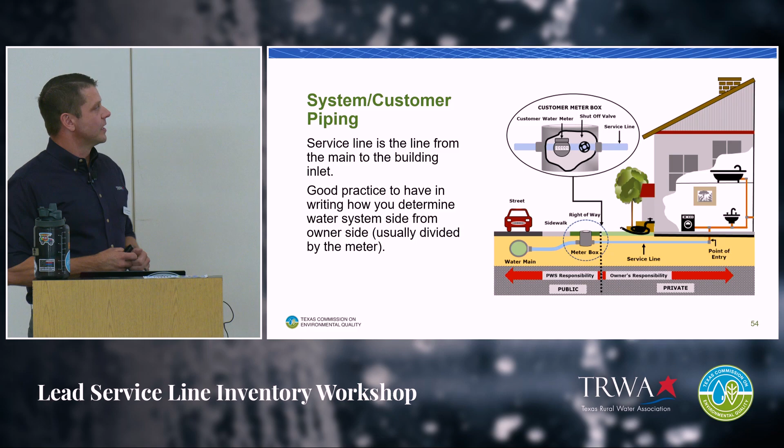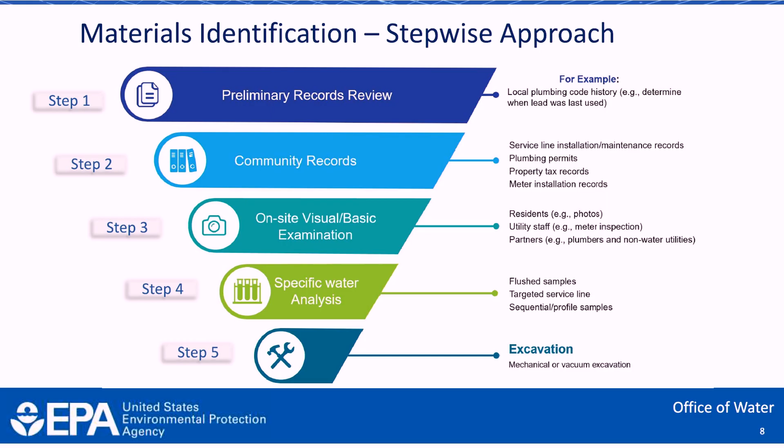So the process of doing the inventory is a multi-step approach. The first two are what we're working with initially. You have to do a preliminary records review and then also look at community records. The idea from TCEQ is that we want to do everything based on paperwork, as much as possible, before you go down to step 3 and further on to do on-site investigation or visual examinations.

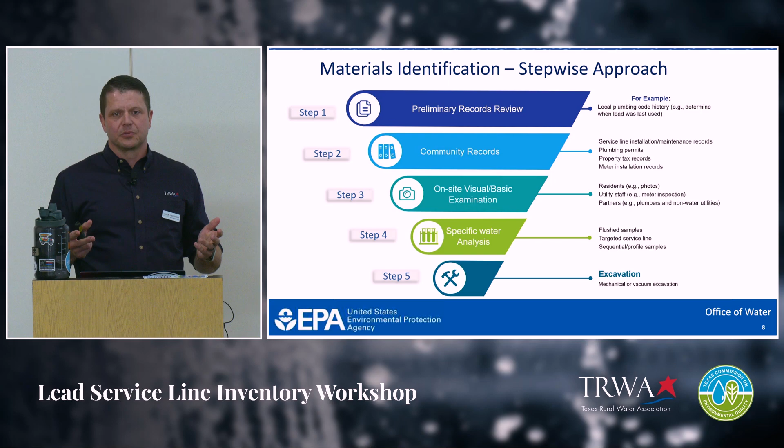So record review, as we've said multiple times, is a must. Under the LCRR, initial inventory must include all service lines, so as we explained, the entire service line, regardless of ownership. The initial inventory must use historical records, so you have to do a record review, as we've mentioned multiple times.

Non-lead must be determined to be non-lead or galvanized requiring replacement through evidence-based records, investigations, methods, techniques. You have to prove it to show that it is in fact non-lead, not just a matter of, I'm pretty sure that it's all PVC. There has to be some kind of records that you are reviewing to state that. If the water system is unable to demonstrate that the galvanized service line, say on the customer side, was never downstream of a lead service line, then you must assume that the upstream service line was in fact lead.

Question: When you refer to record review, let's say we have to prove that it is PVC or polyethylene tube, so we have the as-builts, right? But most of the as-builts don't necessarily show that it's a service line from the corporation to the meter to the angle stop, right? But it shows it on the detail. Is that something we can use? Answer: As long as you have a record of it to show that that is the material that was used, that is a record.

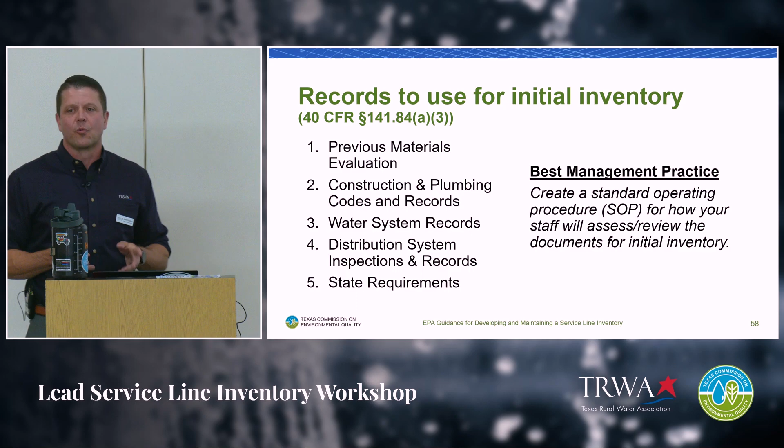For your records review, the initial inventory has 5 different components listed for how they want this done: previous materials evaluation, construction and plumbing codes, water system records, distribution system inspection records, and any other state requirements - in our case, TCEQ. I'll add a note here: it is best management practice to have some kind of SOP for how you are determining lead, non-lead, galvanized, because interpretation can vary from one employee to the next. So if you're using various people to go out and do these inspections, or find records, it's good to have a set standard for how you're determining this.

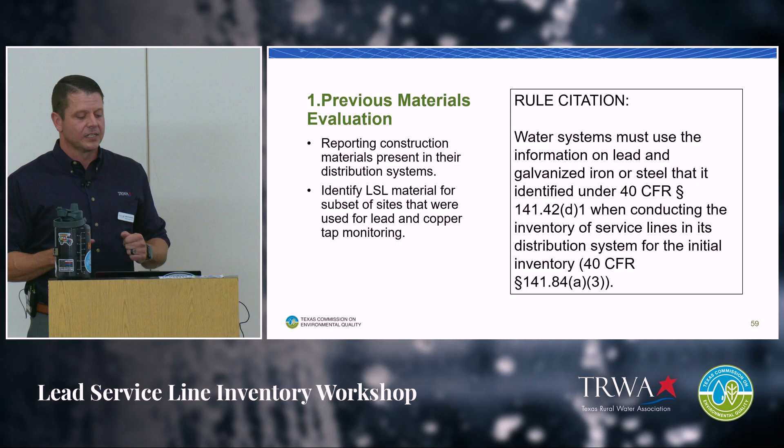The first one, previous materials evaluation - the rule citing water systems must use the information on lead, and galvanized iron and steel, as identified in 40 CFR when conducting the inventory of a service line and distribution system for the initial inventory. So you're looking for reporting construction materials used in the distribution system, identifying lead service line materials and subsets of sites, trying to do an evaluation of that - but this was primarily driven from the 1991 Lead and Copper Rule, where systems were required to do a material evaluation before.

This was to identify potential lead areas in your system, and this is where you developed your sample siting for your tiered sites. So in a way, we've done this material evaluation in the past. The idea is that we want to go back to this as the first step - what are the documentation and information you reviewed to do that part? Start with that.

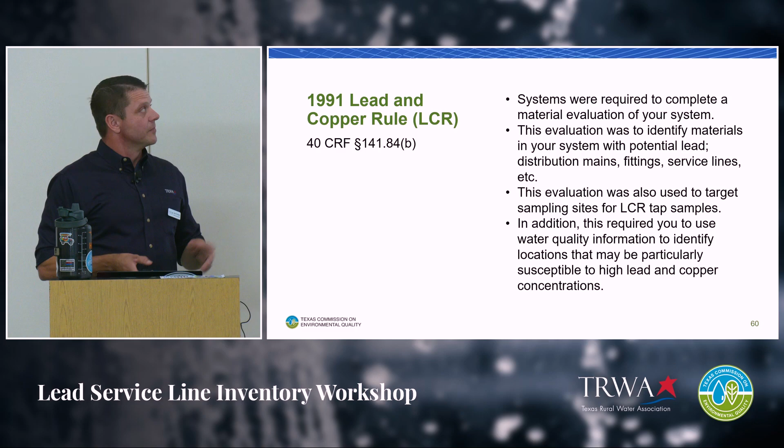In addition, this required you to use water quality information to identify locations particularly highly susceptible to lead. So, of course, whenever you were building your sample siting plan or your lead and copper sites, you were to use the more susceptible sites for that testing. Again, that's what they're referring to here - look back at the information you collected then.

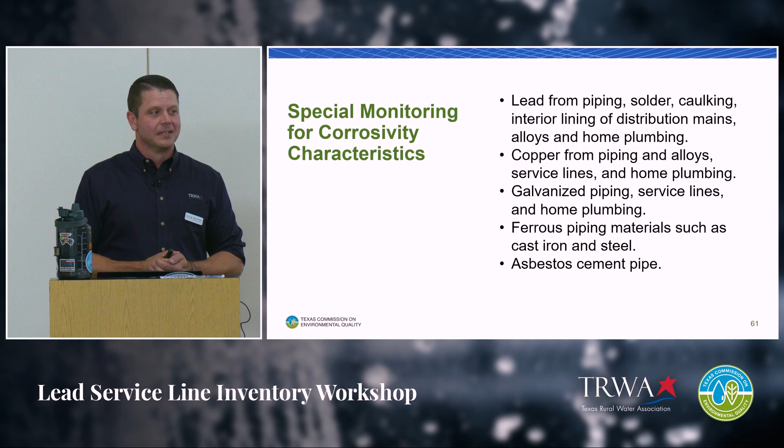There was also a requirement for special monitoring and corrosivity characteristics. This was part of looking for lead and solder in pipe, looking for copper lines, galvanized, ferrous, iron and steel, and asbestos. So you built an inventory to some degree at some point in the past. This was prior to my time in water, so I don't quite remember doing this particular step back in the 90s area, but this was in place.

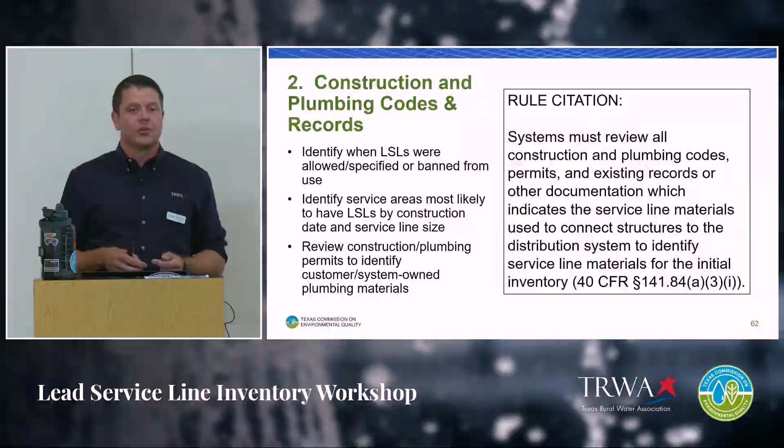Identify areas that are most likely to have lead service by construction dates or service line sizes. At a certain point, we weren't even allowed to put in a smaller line, so less than 2 inch. So if certain sections of your system are 1.5 inches, you can almost date them back to a particular time that could be more highly susceptible for lead lines.

Review construction and plumbing permits to identify customers and system-owned plumbing materials. Some background: in 1986, the Safe Drinking Water Act had an amendment for lead-free. There's a 2-year period from when EPA establishes something for the state to actually adopt it. In July of 1988, TCEQ adopted that, which is why they used the 1989 number. Anything built after 89 should be considered non-lead because there was a lead ban from 88.

That's also why the template for the lead service line inventory asks about this date. When you're looking for construction and plumbing codes, or plumbing records, there are a few different locations you may be able to search to find some information.

City websites may have some of that. A lot of this is city-based, as you can tell. Rural water supply corporations or districts may not have the particular resources available, but sometimes on the websites there's the clerk's office, code and enforcement, a planning department, city archives. We've found that in some smaller areas, they are located even in local libraries or county offices for plat approvals.

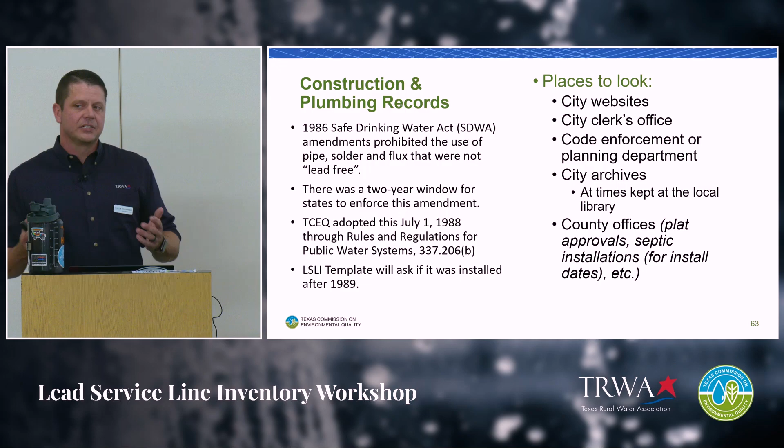I don't know that all counties do this. I know we're seeing a lot more of it now because of all the growth, but counties have to approve certain subdivisions coming in, what they're being built as, the size, what's being installed. So there may be some information, if your county was doing this previously, to search up dates and materials used that way.

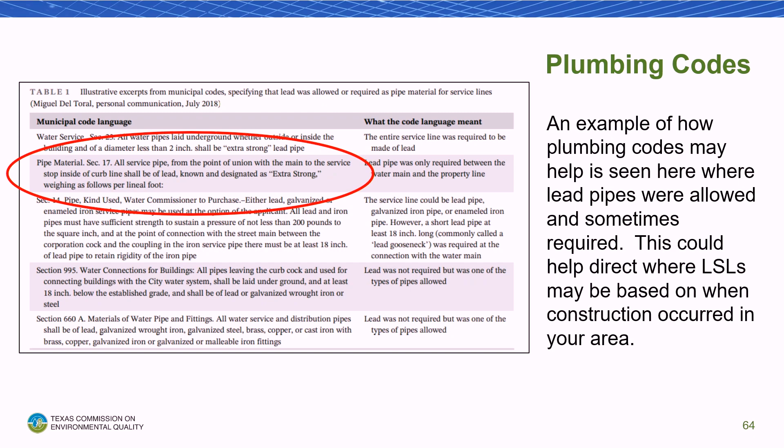This was an example I pulled, you won't be able to read this. I can barely read this, and I'm standing in front of it. But in the EPA manual you received, there's the spiral document, and also online on that Dropbox link shared in the chat, you should be able to download that or find it on EPA's website.

It's the guidance manual for lead service line inventories. There's a section I noted was on page 42, showing an example of why they're saying look at plumbing codes. It states that the service line shall be made of lead and then be labeled as extra strong. So there may be plumbing codes or ordinances in cities or counties that required certain materials. What we're looking for is to find dates of when that stopped, so you can identify anything built within that time frame as more likely to have lead.

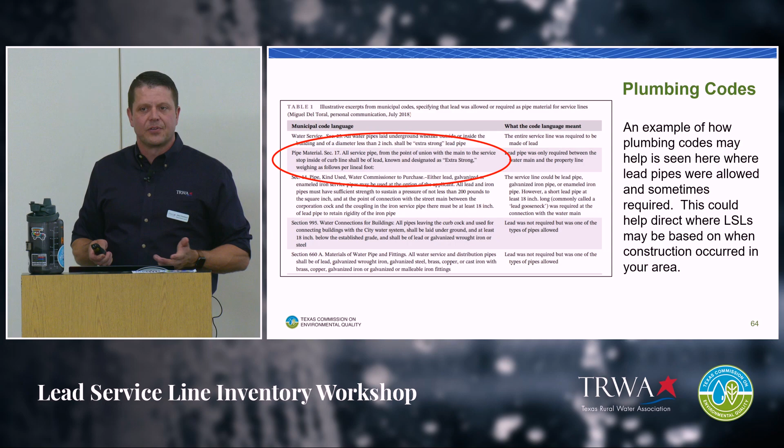Also, in the EPA manual, it states that most lead service lines are 2 inch or less. There are very few cases where buildings receiving a service of 3 inches or higher were made of lead service lines. So that may be another way to help identify focused areas. If you have large service lines, say going to an apartment complex or a larger building above 2 inch, there's a good chance it's not going to be a lead service line based on historical information.

County appraisal districts. I did actually include some fun facts from a lead service line inventory workshop. This is information also in the EPA manual: lead service lines were primarily installed in the late 1800s all the way to the 1940s, and some communities continued through the 1980s. In one workshop, someone more of a historian shared that the use of lead service lines often worked around war times, because of the metals and materials needed for times of war, which would alternate the type of piping materials used for water systems. It was interesting to note those date ranges and their impact on your utility.

Appraisal information by itself is not enough to determine if it is lead or non-lead, because it will give you information on the customer side. So if you look up your county appraisal district and find that a home or building was erected in 2001, that should be evidence enough to show that it is non-lead, since it's after 1989.

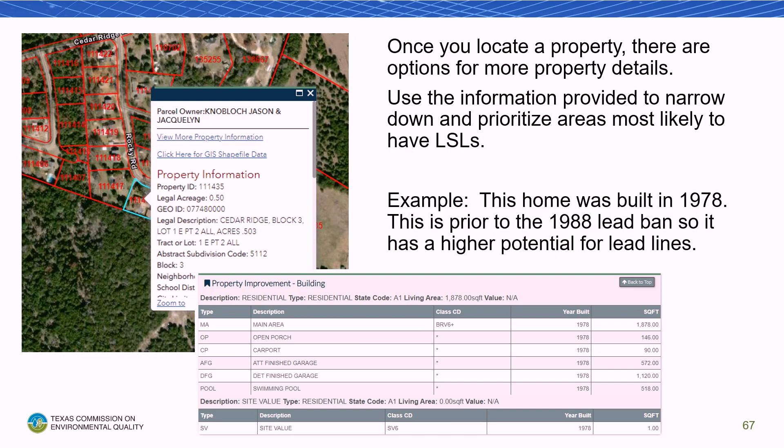From this information, it shows that my home was built in 1978. You can decipher that I have a lot of home maintenance that I do often, but also that is prior to 1989. So there's a good chance that there could be lead service lines in there. This is one you'd want to focus on and try to either find more records to determine what it is, or at some point go out and do a visual inspection if you're listing it as unknown.

I've talked to TCEQ and even our GIS guy, trying to work with some of the counties to see—typically you can pull information from the county appraisal districts. You can get an Excel sheet exported, or shape files to go right into your GIS software. But typically, it only shares the information on that first screen—it doesn't really give the build date. So we're trying to find ways they can include that in the export, because you may be able to cross-reference that with all the addresses or connections in your system. Being able to identify that and knock off a good portion of those would be a significant time savings. So this is one way to do it.

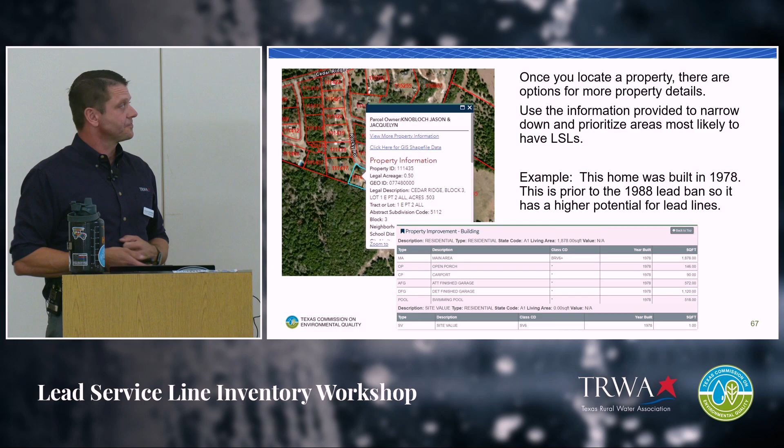Water system records—this is all your internal records. I'd suggest looking to your engineers, for anything that was built, upgrades, capital improvements you did through your engineers over the years. They may still have some records, bid lists, materials lists of the items used when they bid this out through their contractors. That may give you information on a particular section—whether all the service lines were made of polyline, PVC, or copper. So check with your engineers; they may have some information.

This may also be another way to check on the customer side. If you can find the engineer that developed a particular subdivision, they may also have that information through whatever contractors they used. So that would possibly address the customer-owned portion of the line.

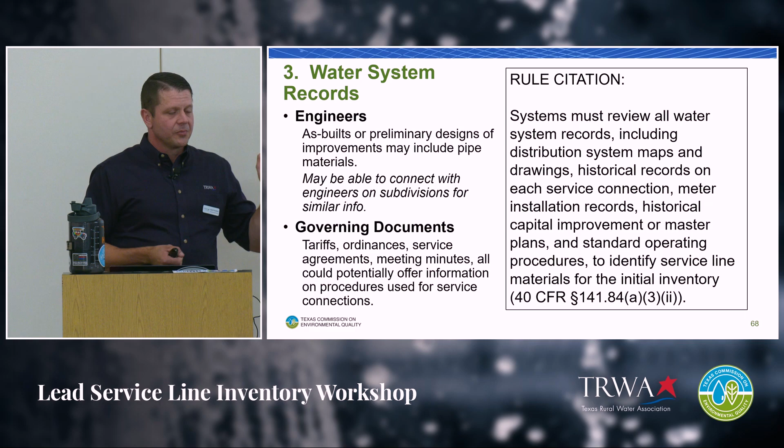Any government governing documents—look into your tariffs, ordinances, service agreements, even meeting minutes. There may be a time where you addressed that at one point you did use lead lines because they were sturdy and easy to use, but you actually made a call in a meeting to say from now on we're using this particular type of material. So think about all of the potential areas you can research in your documentation.

Work orders and tap cards. Tap cards is not really a term that I was familiar with until we kept hearing about it. I know a lot of the older cities that were established here in Texas, they use the term tap cards, but for me, it was work orders. That's just how we did our work.

So reviewing all of that information, seeing when taps were installed, of course. If you're not tracking, when you do a new tap, a new service agreement comes in, and you're out to go put in a new service, if you are not currently tracking when you did it, who did it, and even the materials used, I would suggest that you start.

This may not be the end of our inventory process. At some point, that may change. Rules may change again to where not only right now lead goosenecks are not lead lines, but it could change. Tracking all of this information and keeping up with it, there may be rules down the road that change as well. There's also other cases, I don't want to get too far off the trail, but where you needed documentation to get other things done, like alternate capacity requests.

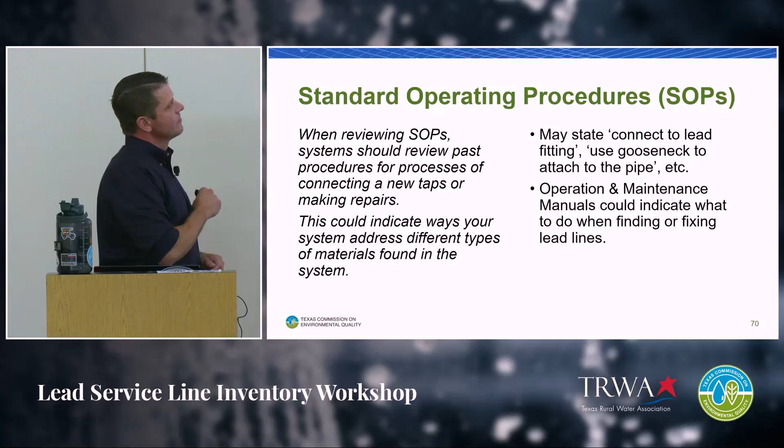Standard operating procedures, if you do have a set standard of how you do things. If you have an SOP for putting in a tap, for fixing a leak, for doing any type of services in the field, look back at those. Maybe there were some amendments or changes over the years.

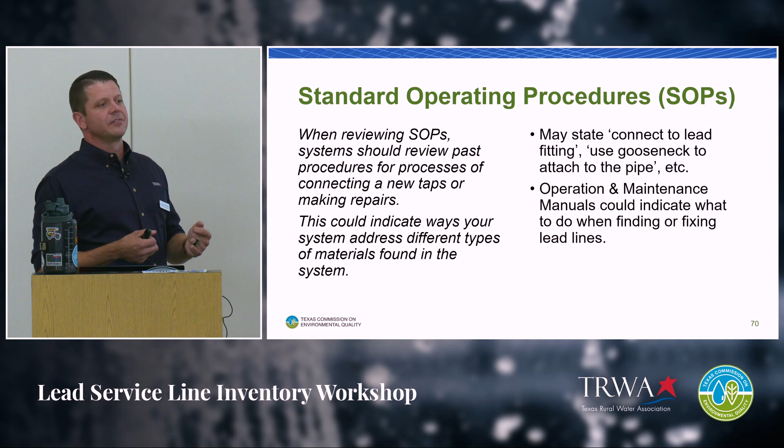Best practices show that any kind of documentation, you have an amendment line at the top or somewhere in the document to say that this has been changed by this person on this date, so you can look at revision dates, and you may find an older one that says, in fact, in the SOP that we used this material, this lead line, or this type of fitting. So go back and review to see if you can find anything there. O&M manuals should be basically a collection of all your SOPs, so go back and look in that as well.

Distribution maps, also one of the system records. Older sets of maps, as-builts. There's been a lot of cases where I show up on a system and they have, I don't even know what type of paper it is, but I can tell they're very old. That may have some information on there that actually wrote in it was polyline, it was PVC on the map itself. So reviewing older maps.

As I mentioned before, looking for smaller lines. I have seen a utility using a 1 or 1.5 inch line as a main line. We haven't been able to do that in a long time. So that may give you some indication to start looking in that area because that was probably put in some time ago. And also utilizing GIS.

I know we keep mentioning that, and it's not that we're trying to pitch or sell GIS software or anything, but the benefits of using it are very great, especially in a case like this, where you can not only capture the physical or the geographic representation, but all the information that goes to that particular point. So if you have GIS and you're saving this, this is a good place to collect it all.

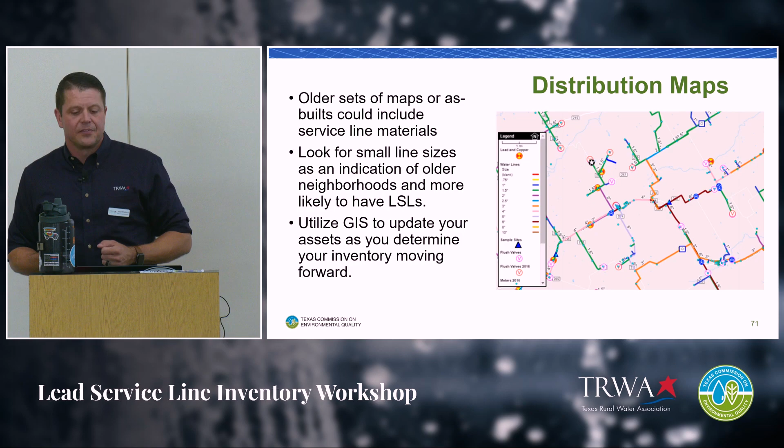There are some exporting tips that TCEQ put together, and it should be one document on the Dropbox link that was shared in the chat. Excel tips, I believe is what it was called. Different ways to pull information from GIS. So just for one example, Esri has a way that they can export all of your map data and maybe try to get it into the template. So look into that. There's various types of GIS software out there, so each one is going to be a little bit different, but one area to look at.

Continuing on. I think I really just said all this, just forgetting that I had a slide to say all this.

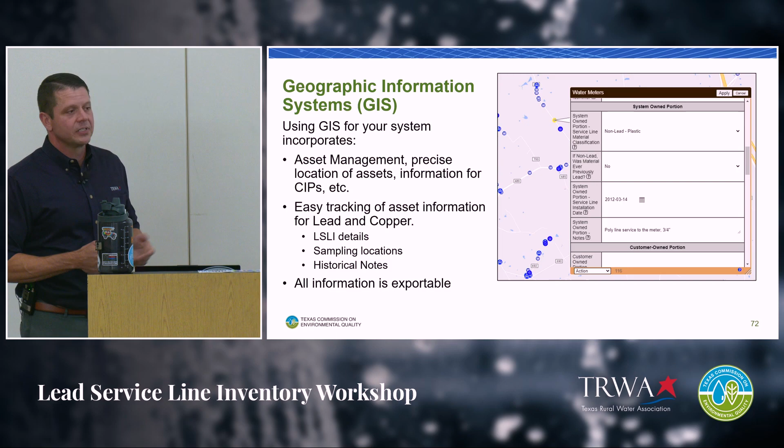But I will add that a lot of these software companies now, because of the new rules, are very aware of it. They're actually including certain features, attributes, layers that are addressed just for lead service lines. They know that this is going to be an impact on you all. So collecting it in the field as you go through your normal day process is a good way to actually obtain all this information and keep it all in one spot. So again, your software, if you use that, may have these abilities.

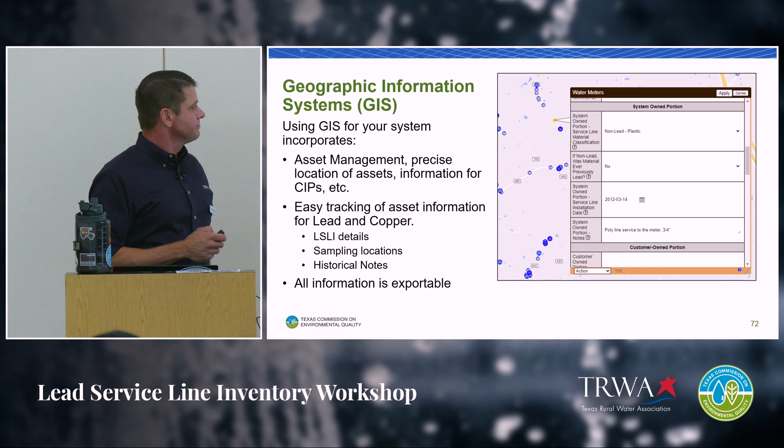Service agreements and tariffs. You may be able to locate old tariffs or service agreements that have information about materials used, what you allow for the customer to use, and what you use on your side of the system. This is more updated information, but your newer agreement should show new lead and copper rule information of what the lead percentages are, or that it's lead free. If you can't find anything dated that would indicate you allowed lead lines at some point, at least make sure it is current to today's standards.

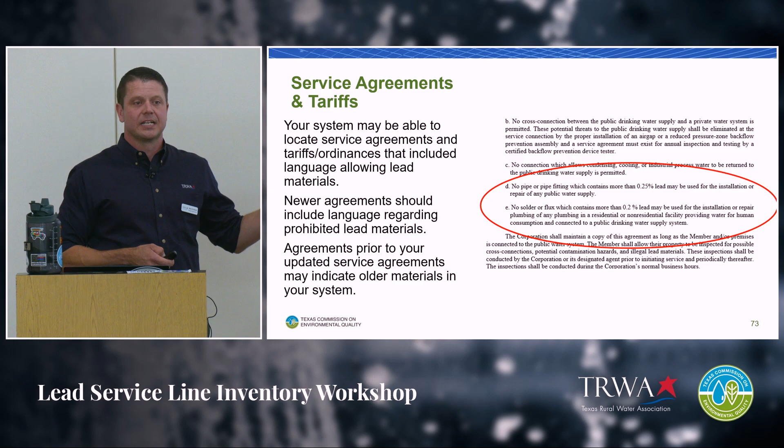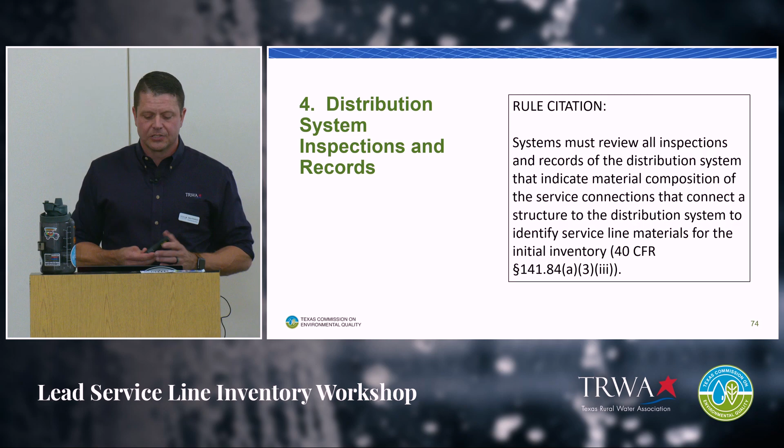Distribution system inspections and records. Systems must review all inspections or records in the distribution that indicate material composition of the service connections that connect the structure to the distribution system. So as Alex mentioned, CSIs should be a really quick go-to to determine what is used on the customer side. We typically gather a lot of information from internal plumbing or premise plumbing, but part of a CSI is also to go around the outside of the building and look for cross connections. You should be identifying what material is being used on the property, and there is a section for that. So as long as you're keeping up with your CSIs, that's one of the immediate records I'd go to. You should have one for every service connection, because you're not only doing them, but keeping them. So look back at that.

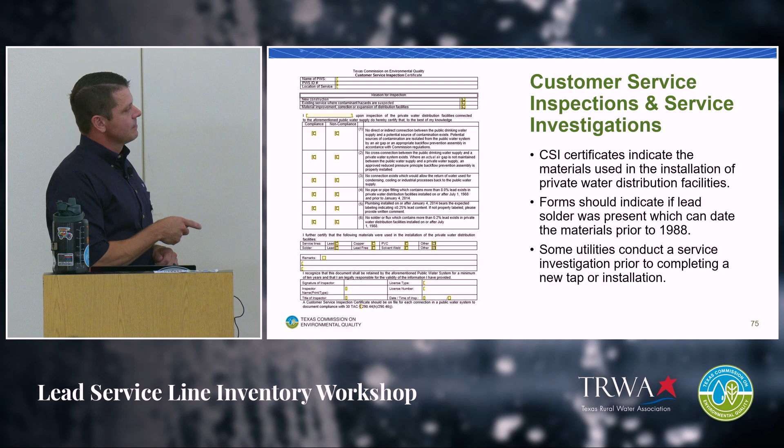Water quality sampling is another method to look at your prior and current records. Any information you've obtained through your monthly, quarterly, or annual sampling may have indicators of potential lead in service lines. Your past lead and copper sampling may indicate higher levels in certain areas, which may direct you to focus more in those spots. So review your sample sites for your tiered LCR.

Customer surveys. This was a question we had early on, and it took some conversation before we finally asked TCEQ, because this puts a lot of reliance on the customer to tell you what they use. Hopefully in most cases the customer would be willing to share this information. Now, how much documentation they have could be hit and miss, but a system can conduct a material survey asking customers if they know the material type on their side of the line. They installed it, so they may have information, and they may even have receipts. I know a lot of people who are really good about keeping their home records, so if they have copies of receipts and are willing to share them, that shows the materials or buy list of what they used to put in the ground or in the home.

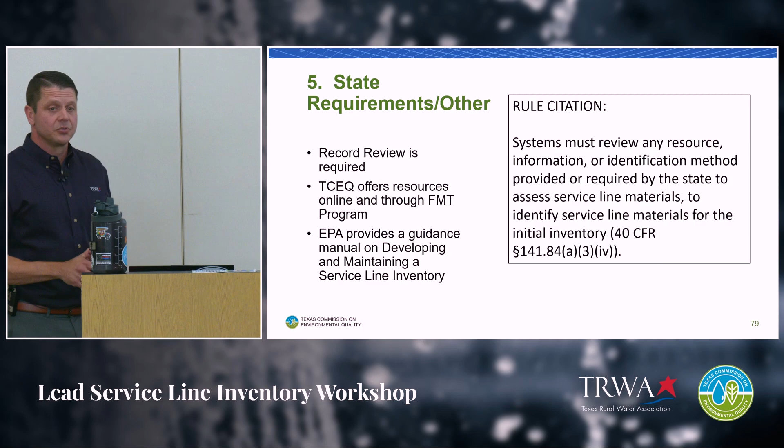EPA provides a lot of guidance. The manuals you have contain a lot of good information, and a majority of this particular section is from that book. They go through examples of how other states and systems are doing it, and the success they're having with some of these methods. I would definitely take a look at it.

So, takeaways from the record review: LSLI requires a thorough examination of all potential records, so you can't skip it.

It is not expected for utilities to go out and start digging up lines. In some cases it may seem easier than going through paperwork, but you still have to do the paperwork anyway. I know that was an initial concern for a lot of people—if we're having to identify all these lines, that's a significant cost and time to dig everything up. There were a lot of comments about potholing and how much of the yard we're going to have to dig up. That's not the intention. For initial inventory, they want everything done through record review, so there should not be a need for that.

And then, of course, exhaust all documented information prior to having to go out and do visual inspections.

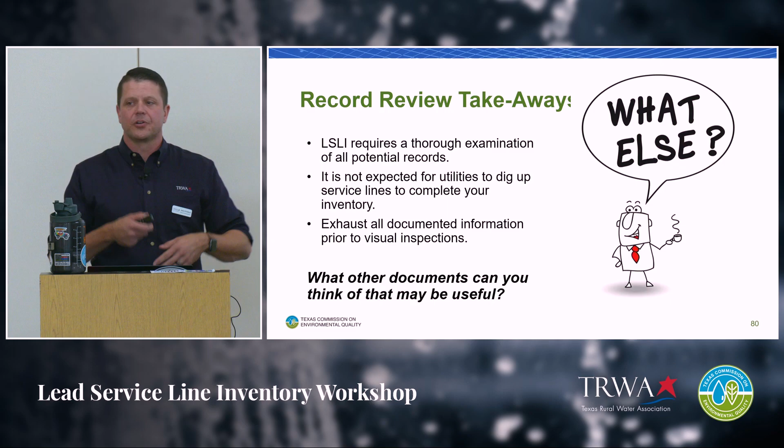Is there anything that hasn't been covered? I've got a few more to go over, but just as a stopping point—is there any other records in your utility that could be a resource, that someone else may also have and not be thinking about?

Bid specifications. Yes, bid specs. So if you're putting together projects or jobs, you do have bid specs showing the kind of materials you wanted in the ground. That should be information you can gather from an engineer that did the project for you.

Are senior personnel interviews also accepted? That's right—similar to customer surveys for the customer side, TCEQ is accepting an interview, so to speak, where a person who has been there long enough, who watched a particular subdivision go in and knows the material used there, signs off that it was all done with poly line, for example, through an affidavit or some sort of confirmed interview.

Which is very beneficial, because you can knock out large sections that way. But you've got to catch them while you have them—that's the big thing for the water industry right now, everyone's retiring. So hurry up and get those interviews done.

All right, next steps. We went through the various ways you're supposed to be gathering your data. So you're starting your data set, and then narrowing down the fields of what you really have to spend more time on—finding information showing that a certain section of your system is before or after 1988, and narrowing those down.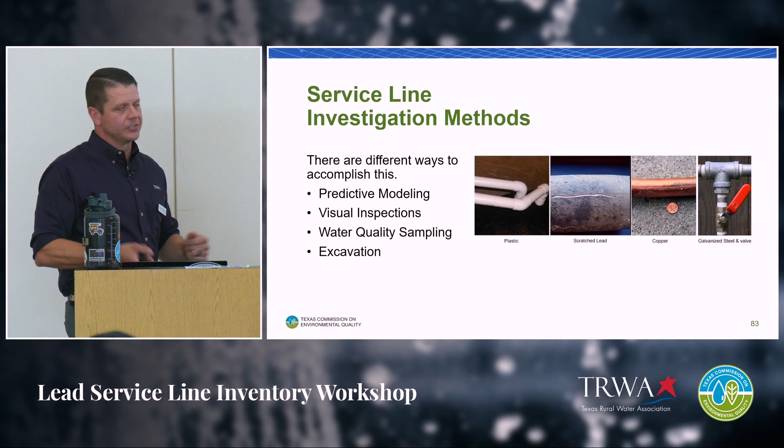Predictive modeling is a form of data mining that works by analyzing historical and current data and generating a model to help you predict what could be out there. This is generally used through AI, not necessarily always, but in most cases, to help you determine if a certain section of your utility could, in fact, be high potential for lead lines.

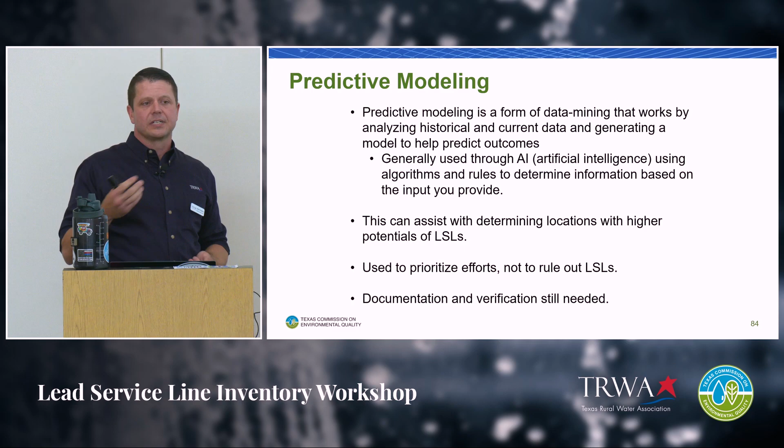There are actually a lot of service providers out there doing this with the lead and copper inventories, and even some of the other LCRR rules, using a lot of AI. This can assist with determining locations and help you prioritize your efforts. So when you have a lot of unknowns and start something like predictive modeling, you know where to at least start. This really is helpful for very large utilities.

Documentation and verification is still needed. This is not an end-all. If you have a prediction that this is not lead, that's not necessarily going to fly, as mentioned earlier, it's case by case. If you can come up with enough data to back up what you are predicting, it may be just fine, but for most cases, this is a predictive measure.

I put an example here, but I think we already went over one — this may be the example that Philip went through, so he stole a little bit of information from my slide. I'm not going to spend time going over that, but the idea is that you can do subsets of sampling and try to find information on a few of, say, a subdivision that was put in at a certain time frame. It gives you an idea that if these particular ones did not have lead, the assumption is all of these did not have lead. But again, you have to verify — we can't assume anything.

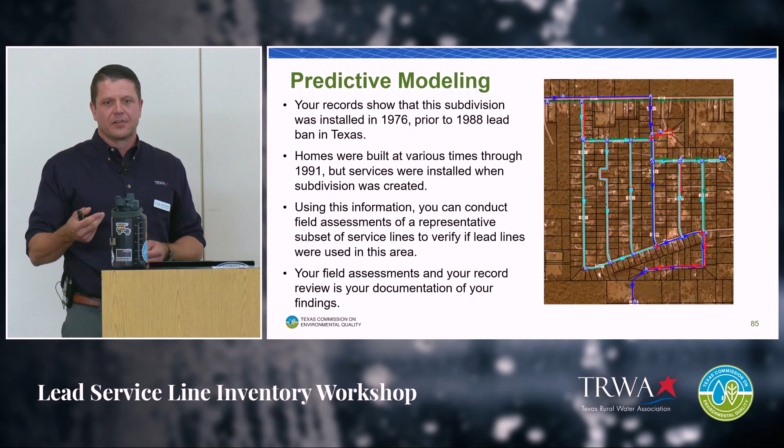Visual inspections, as it probably seems, are pretty self-explanatory — going out, even during your normal process of reading meters. A lot of people are moving to AMI, AMR, and drive-bys, so going to every box isn't as common as it used to be. But even with those, I would still suggest, as a prior operator, go by and read them every now and then. If you are still reading meters in the manual process anyway, go through, look at the boxes, see what the materials are made of.

That's a visual inspection. We're doing some mapping projects now where, as we're doing the mapping work, we're digging out the lines on both sides just to see if we can verify what type of material is being used.

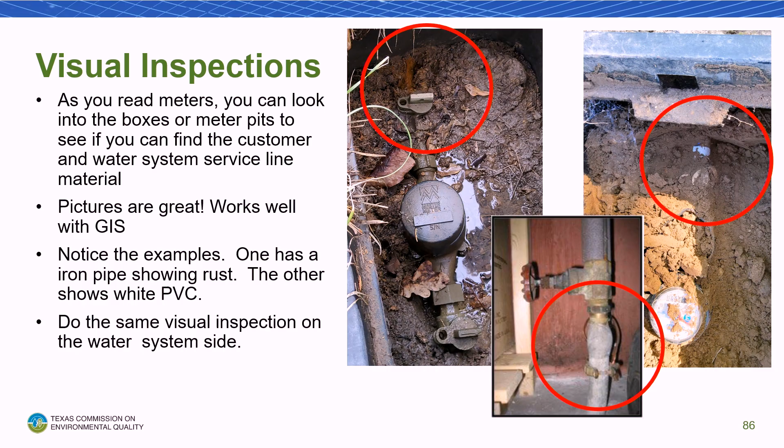The pictures won't show very well here, or on your handouts either, but this presentation is on that Dropbox link if anyone wants to download it later. The picture on the left shows there is a metal line — a rusted galvanized pipe. You can't really see it well, but we can identify the material type just from that visual inspection. On the right, we didn't dig up very much, but enough to see that it's white plastic. So that was a visual verification of what type of material is coming on the customer side of the line.

So if you're doing something like this, also make sure you're capturing the information on your side as well.

Pictures work great. They work great with GIS because you can store all this information. If you have a question about a certain service, you can pull that particular point up. You have all of the documentation that you've gathered, and you have a picture associated with it.

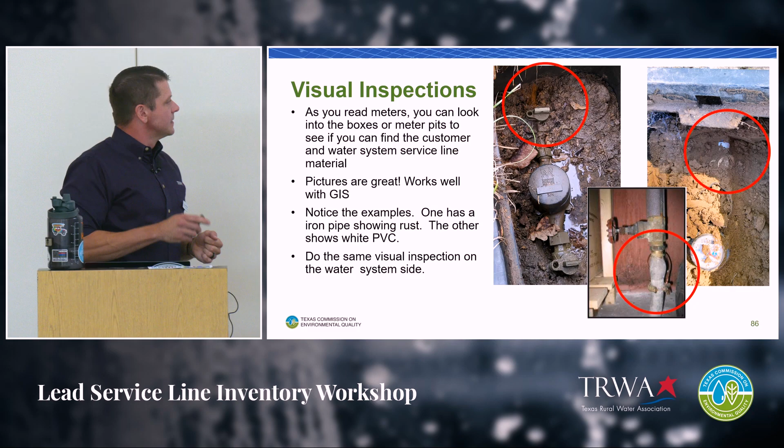The scratch, swab, magnet test. If you do find a line and you're unsure what type of material, the scratch test is that you can put a small scratch—I want to make sure I emphasize a small scratch—into this line. It is a soft material, but you should be able to see the shiny metal come through. This is typically an indicator of a lead line.

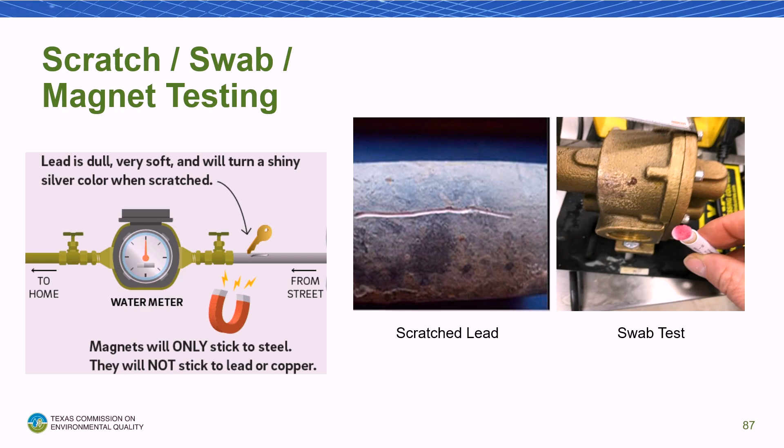The swab test, of course, if you do CSIs and you're used to doing the swab on the solder flux, you'll see that you may be able to swab the material to see if it is in fact lead. And then, of course, magnet testing—lead lines are not magnetic. So there are some physical ways that you can identify the type of material it is.

Water quality sampling. Again, the EPA manual goes into a lot more detail, but there are a couple different ways that you can do sampling to try to identify what it is. I will say that this is also not a way to completely rule out lead. It's similar to predictive modeling, that if you can show enough data, it may be enough to vouch that this is not a lead line. But just sampling alone by itself is likely not going to be enough.

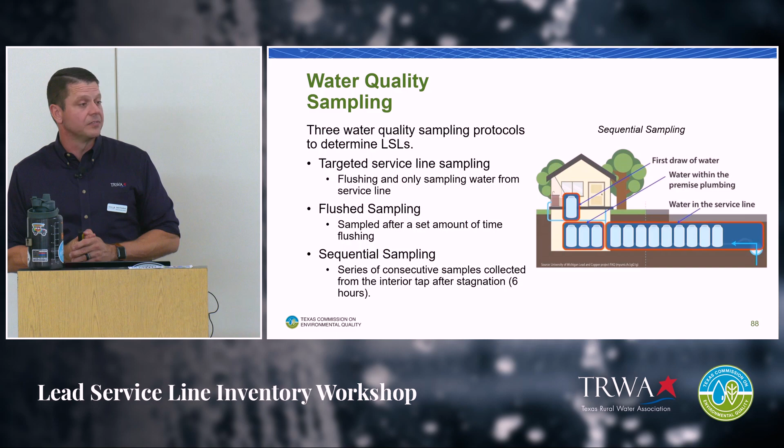Excavation. This is the one that people have the most concern with, especially on the customer side. We live in Texas. We all probably have fear of walking onto someone's private property. So going out there with machinery and tearing up the grass is definitely a fear—we don't want to do that. And again, that's not the expectation from TCEQ, to go out and start potholing someone's yard.

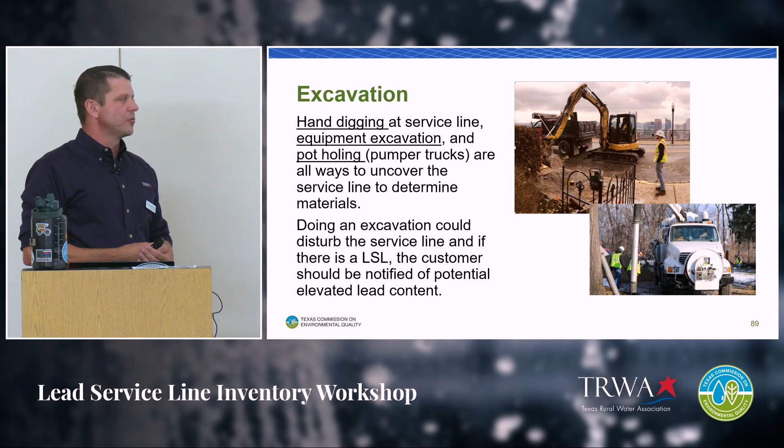If it comes down to having to verify what it is, in most cases you can do like the meter boxes and be able to see the material somewhere close. I know for a lot of the meters that I've seen, typically there's actually even a spigot right past the box, because when a new home is installed, they at least get water service, and then they add to that moving on once the home is built. So there should be some kind of indicators very close to the meter to give you some kind of information on what type of material it is without having to dig.

But hopefully if you do get to the point of having to do some kind of excavation, you can do it in the least invasive manner possible.

If you do actually have to do some excavation, and you determine that it is a lead line, and you disturb that line to some extent—even just shaking or rattling that line—you do need to notify the customer of the potential increase in lead, because you've possibly shaken up some material in there.

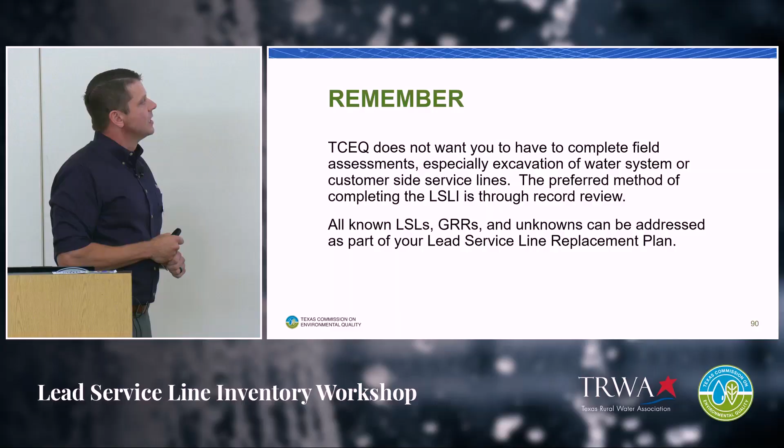I'll say this one more time: TCEQ does not want you to have to complete field assessments. They would really want everything done by record review. So if you can find records from anything in the water system—the counties, the cities, the customer side—any information that they may have, the surveys, there's a lot of different opportunities or resources out there. For a utility to say 'I have no records,' it's really hard to take that, because to some extent there is something out there. So again, I would just suggest if you don't really have a lot of utility records, this is a good time to start.

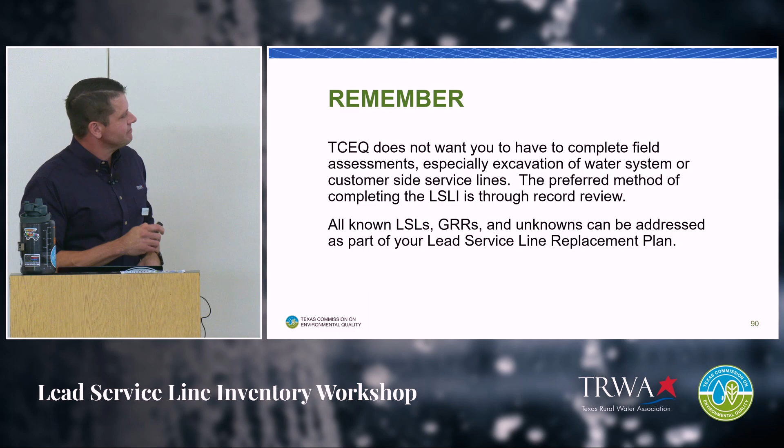So that was the methods of gathering. Do we have any questions on that section so far? None here. I know we have some online.

Okay, so online, someone asked if a metal detector can be used to detect lead and copper. No. Yeah, this is like any predictive modeling, it's going to be case-by-case basis. It could possibly identify a portion that you need to look further into, but metal detectors will not be accepted to determine a non-lead line.

Well, and I do have a follow-up question for that. So typically on a metal detector, it will identify if it is a pipe, metal pipe whatsoever. So even just using one to say that there was no indication of metal, then it must be PVC—that's still not acceptable, right? Yeah, it would have to be used against records, all record review, and then the predictive modeling proposed again with all of that supporting documentation. Okay.

Were there any other questions online? No. Great.